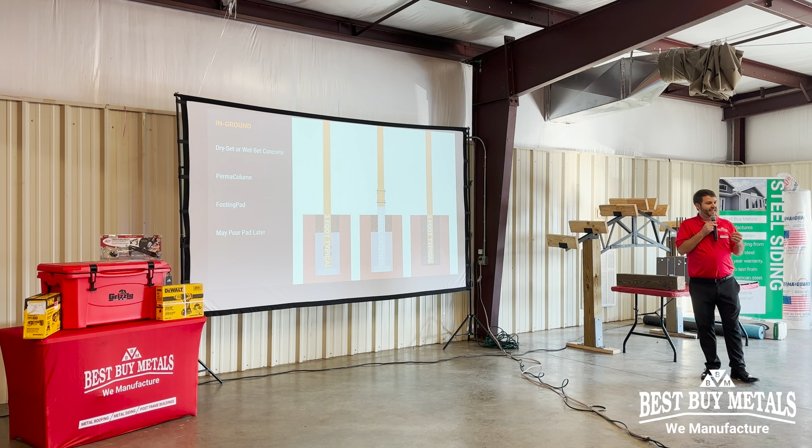We're going to talk about foundations. And there are probably 60 ways to do foundations. I'm not going to tell you all how to do foundations. I want to talk about 6 types of foundations that you should know about, or at least variations of them.

So the first one is you dig a hole. You put in a concrete pad. You can pour that, or you can buy them, 14-inch concrete discs. So drop that down the hole. Your post sits on that. That essentially makes it where your post has something to hold. It's not going to sink down any further than that. It's a solid base for it to sit on. That is optional, but not at all a bad idea.

The other thing I'm going to talk about is these uplift plates. So if you're going to pour concrete in a hole, and your post is going to go in that, these uplift plates are hammered into the sides of the posts. They are an economical yet very effective method of increasing wind uplift when your posts are going into concrete. 1 or 2 per post, just extremely reasonably priced and extremely easy to install, but worth every penny.

You're going to either dry set or wet set concrete. I'm not a concrete guy. I won't tell you how to do it. Some people say don't dry set them. Some people say definitely dry set them. The benefit of pouring your dry concrete in and pouring in water later is you can do that ahead. You can go ahead and get your dirt in, and then you have more time to get your posts right where you want them, a little bit right, left, as far as just making sure they are perfectly level.

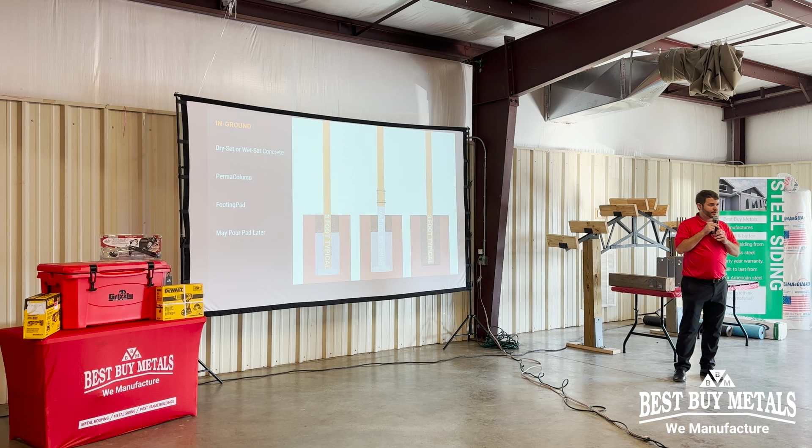And also the depth. So this is showing about a 3 foot. Depending on how much concrete you're putting, you can also do a 2 foot and do a bigger, wider pad. So this is about 18 inch. Sometimes people do a little bit narrower than that, maybe 16 inches. Some people do 24. It's all about what you're trying to hold down, and also how much weight is going to be applied to that. So that's just a common way to do that.

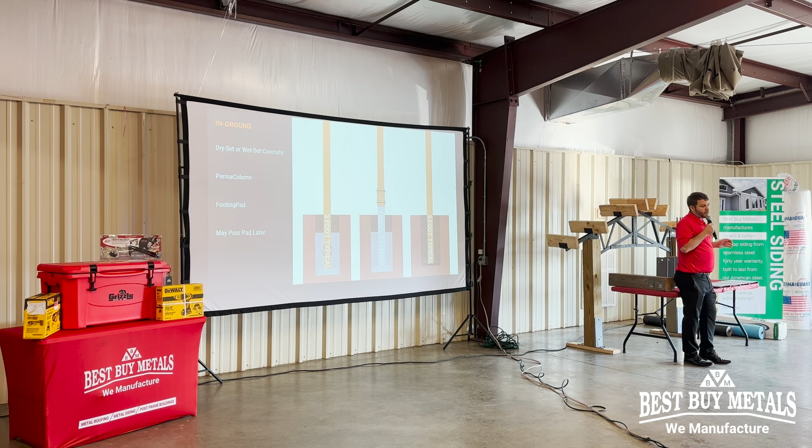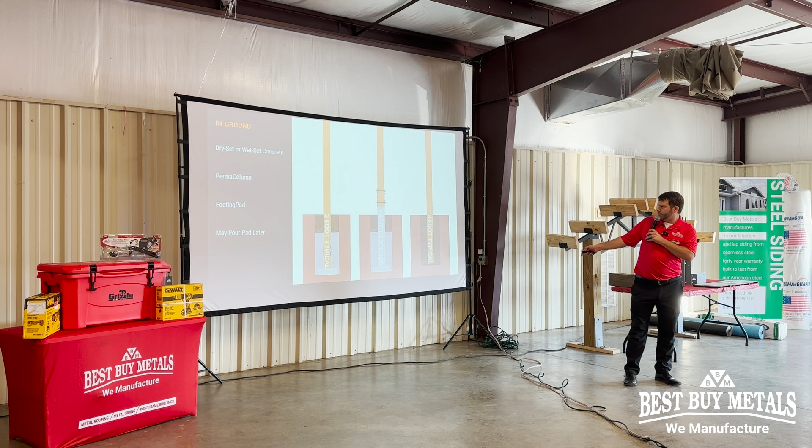PermaColumn. So this is a different method of anchoring entirely. So you're still using a pad. PermaColumn has a 40-inch high precast concrete, high density concrete, and it has the anchor similar to this, already precast into it. The biggest benefit of that compared to setting your wood in the ground is here's all the dirt. There's all types of bacteria and algae trying to eat away your wood if it's in the dirt. If your post goes up here, it's away from all that.

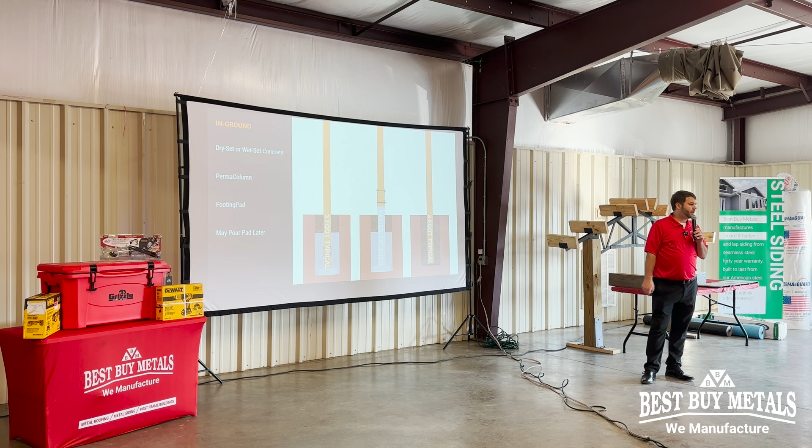To alleviate that, there's a lot of things you can do. Some people wrap their posts with something similar to ice and water shield. Some people dip it in tar. There are plastic covers you can slip over the end of it, but it's still in the dirt. And so this is just a way of saying let's keep our wood away from the dirt. And just highly effective. It's going to be more expensive. Depends on what type of project you're going to do.

The other thing it allows is you can visually inspect your post. If your post is here, properly treated, it can last 40, 50 years. Here, whatever it's doing, you're going to see it. It's right in front of you.

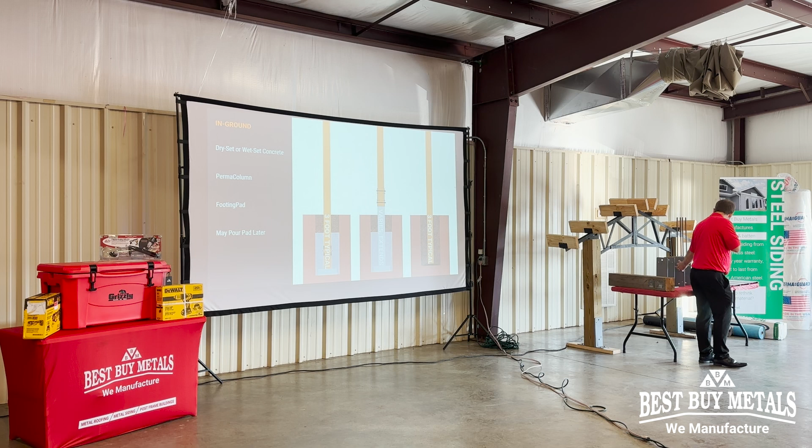This has a 1/2-inch bolt, 2 of those. Typically what people do, and we'll talk about that in a minute, but there are 4 smaller holes. You can use just like a regular wood screw for metal roofing. So it holds it in place until you get your levels all perfect. And then once you get all that right, then you're going to drill for your 1/2-inch hole and go and set those bolts.

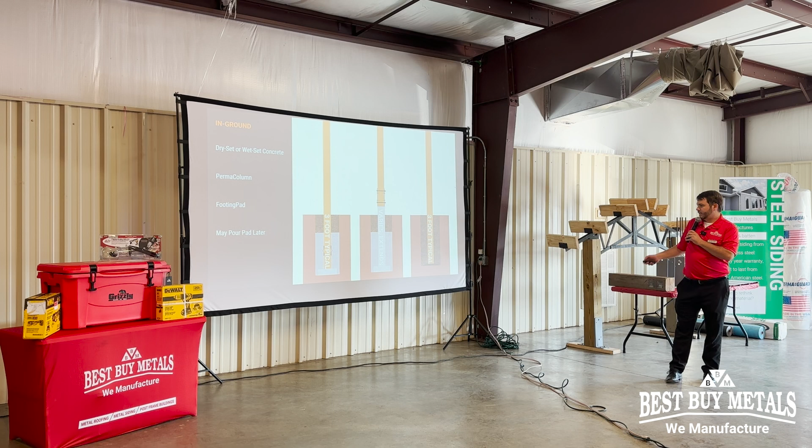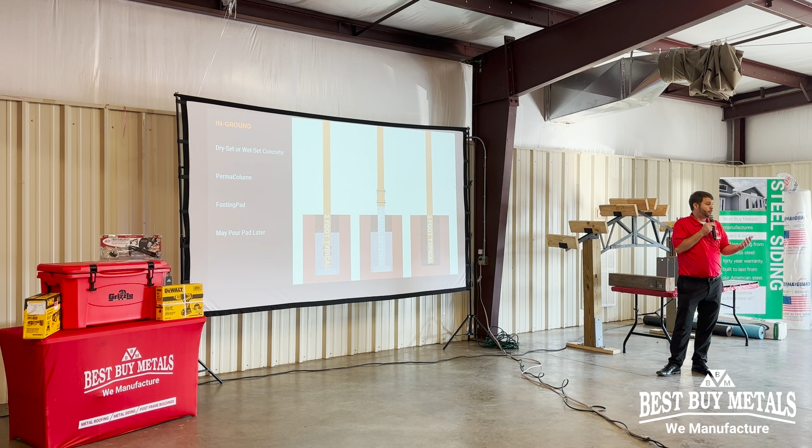And the last one's called footing pad. The main idea of this is you're taking the weight of the building and making sure the whole weight is supported by the dirt. You don't want it to settle and push down further. This is not going to give you added uplift, but depending on the project, that may not be as important. The weight of your building holds the building down as well, so the weight of the concrete does a few things, but the weight of dirt is actually very effective in some situations.

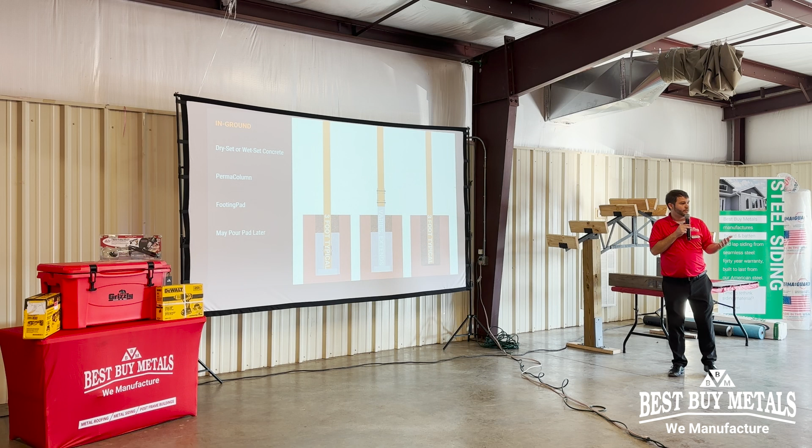Basically it's a plastic pad, and you drop it in the hole just like you would the concrete pad. It makes it so the pressure of that post is evenly distributed in that hole. So that's a few in-ground options.

Now on to slab options. The first one we're going to talk about is drill set. Before you get to that point, I don't claim to be a concrete pour expert, but whether you're pouring it yourself or working with someone that pours pads, you need to know what you plan to do based on the building. That can be different depending on whether it's a shop, a garage, a home, or a barndominium, where you're really trying to make sure you're dealing with any sweating with the concrete.

You're going to have crusher gravel, generally a few inches of that, and that helps level your ground and also makes sure it's nice and solid. Depending on the situation, you may also install plastic, and you may also install insulation, whether that's rigid foam or radiant, kind of like double bubble. Double bubble actually works well for that, or closed cell spray, which is less common under floors. One of the things that's important to think about with those layers is they add thickness, so when you're thinking about what you're going to be adding now or later, keep that in mind. Everything raises up the level you're working with.

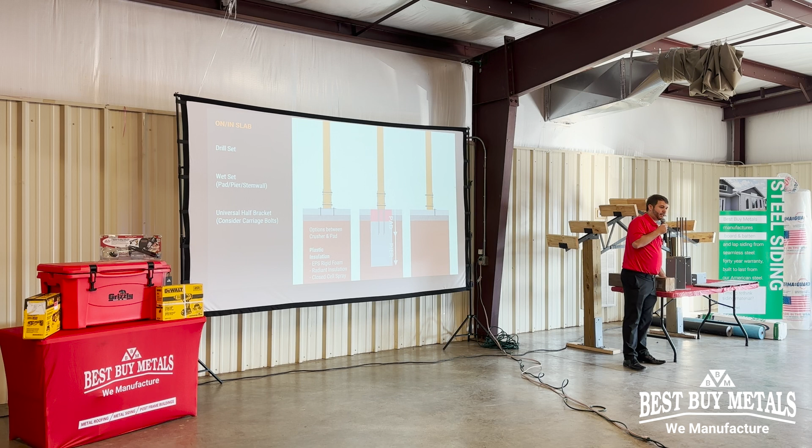The drill set anchors, so you're going to drill your holes, have a 5-inch anchor. I wish I had one here to show you, but we've got them at the shop. You drill those in. The benefit of a drill set is you can pour your pad, get it all ready, and once the concrete's dry and cured, measure for it, and then just like you would anchor a piece of equipment down in your shop, it's the same idea. You're fastening it down with 5-inch anchors that are going to do a very good job of holding that down.

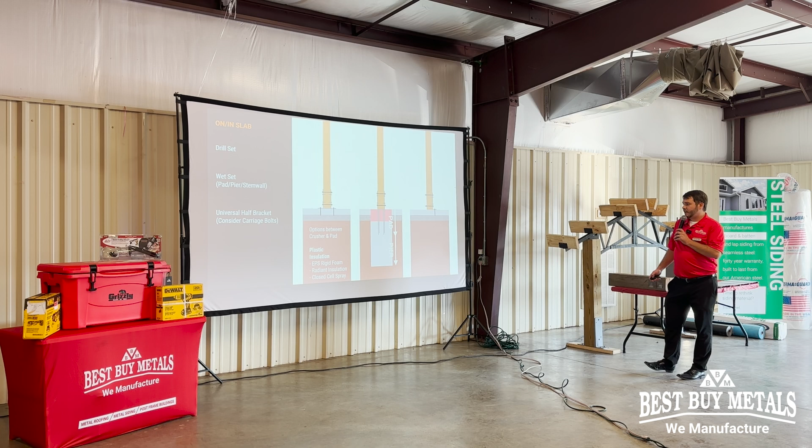The next option is wet set anchor, and there are two very different purposes or uses for this, and it depends on what you're doing. If you're going to put a pad later, at that point you may not need this to go down as far because you're going to have all of the concrete - it's all going to mold together and provide uplift and stability. So you may only need to go down right past the 18-inch rebar.

These are heavy duty. Basically the benefit of that is you've got 18 inches in the concrete. They're just extremely strong. You really won't beat them for strength.

If you're doing piers, so if you're drilling and not doing a full concrete slab, you're just going to put piers wherever those are at. Generally people will go down a little bit further, depending on the size of the building. If it's a smaller building, you may not need to go much further down than the typical 18 inches, but if you're holding a heavier building, you'll want to go down a little farther.

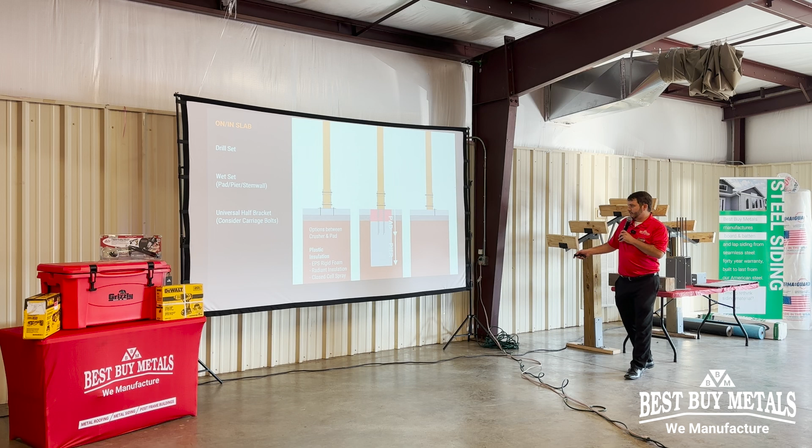This is a sonotube. Basically they sell them at Lowe's or Home Depot or wherever, but it's just a cardboard tube that works as a cast. You slit it, put it in that hole, it expands out, and it gives you a nice level, round surface to pour your concrete and get everything level.

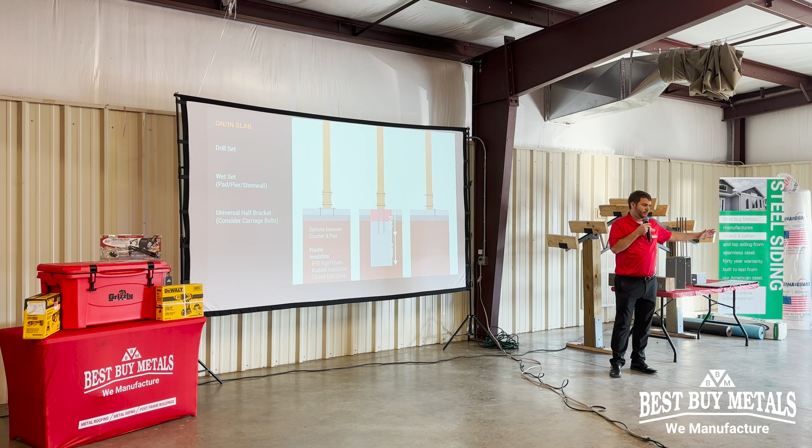The disadvantage of a wet set is everything has to be timed just right. Everything's got to be measured out, and you need to know where those holes are at before you pour. You may want to only pour half of yours and set those, then pour the other half and set those. You don't want it to dry up before you get those in, trust me. Then you'll be saying, let's skip that and move to that. So let's try not to do that.

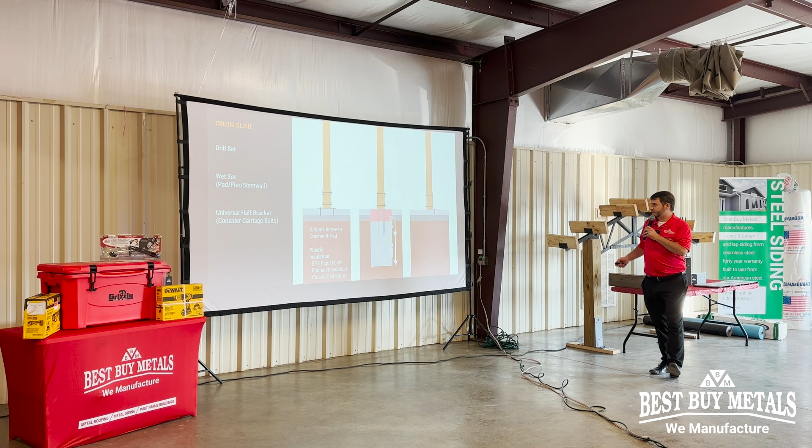The last one is a universal half bracket. The benefit of a universal half bracket is when you get to outside corners, this is going to have a bolt on the outside of your building that can interfere with your wall girts if it's going to be enclosed. Or the drill set has a bracket that will definitely extend past the edge of that corner in some direction.

Your wall girt will cover a little bit of that, but this bottom leg is going to stick out past your building at some point. That's not generally desirable. The other thing that's good for is for doors, where you don't want that bracket sticking into your entrance of your door and you're going to drive over the bolts. So most people just put one of those to hold up each door post support.

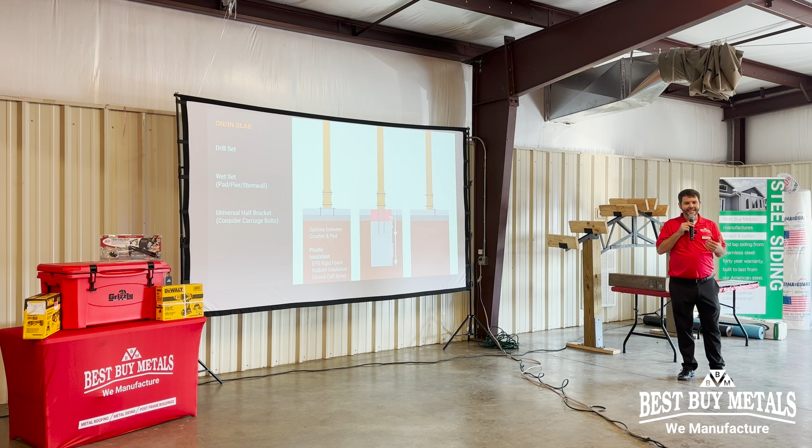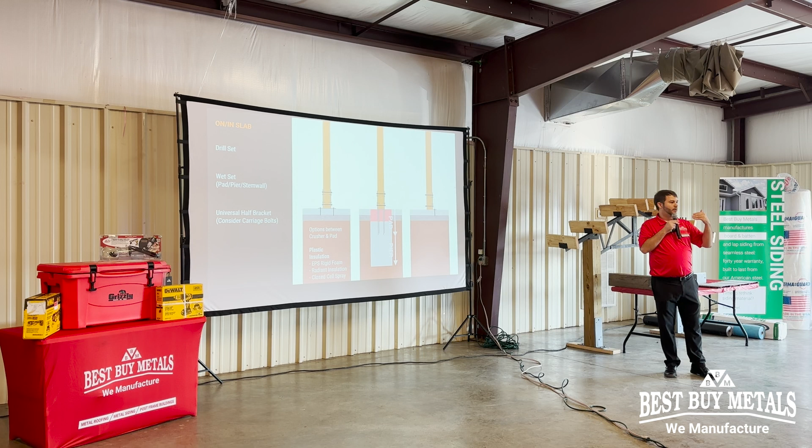Also for those, if used at a door, or even if used at an outside corner, some people use a carriage bolt just to make sure that it's flush. So you can use that to pull that bolt in so it doesn't extend out and interfere with or require that you adjust some of your wall supports. Because we use all drill sets here, you'll see that we had to use some additional wood blocking to help support in certain areas. That's the benefit of these half brackets: all of your wall girts can just be fastened, especially if you use carriage bolts. They're not going to interfere with any of your wall girts being installed.

Site prep really depends on what you're doing. But first thing is you want to think about the water flow. Last thing you want with any construction project is to have water that's going to go towards the middle of your building and pool. So whether it's going to be open frame or enclosed, just keep that in mind.

If you're pre-pouring your concrete pad, that's another thing some people do - they'll install their posts and get everything done with or without gravel, and then come pour the pad later. But if you're pouring a pad ahead of your posts, just keep in mind the size, making sure that all of your brackets are going to fully fit on it. If you fail to account for those half brackets, they might stick out past your pad, and you don't want that to happen. So that's another benefit of those half brackets.

Squaring and marking - we'll talk about a rotary laser in a little bit, but that can help really get a laser line to make sure that those first two most important measurements are perfectly at a right angle. Highly recommended. If you don't have that tool or access to a rotary laser, then you'll definitely want to focus on A squared, B squared, making sure it's squared using C squared.

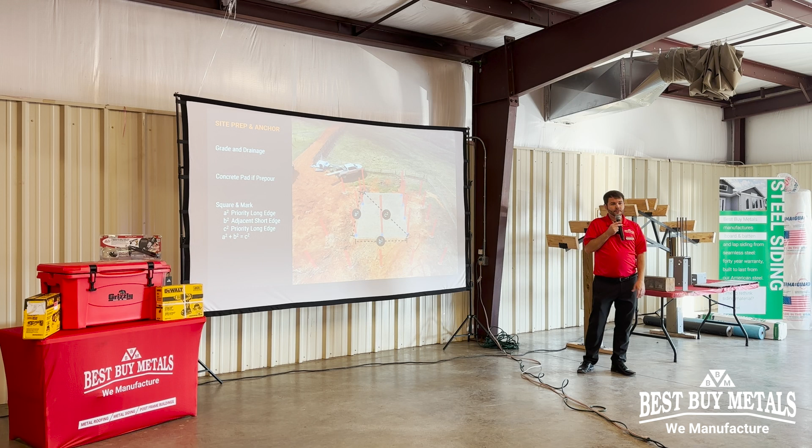So we offer a post layout. Megan, will you stand up for me? And Sarah, will you stand up? Megan, Sarah, and Kelsey are post-frame building experts. If you go to AmericanPoleBarns.com, you put in what you're looking for. If it's a straight run with lean-tos, you can just use words. If you're trying to match something, you can upload drawings. What we'll send you will be all the drawings, a full material list that will show the spacing on posts and all of this. Thank you.

I'll show an example of that here in a moment. So again, what you're looking for is the measurements - setting those two, and then using that to get those two. From there, anything else you're just going to measure out and make sure you're staying square. A squared, B squared, and C squared work the same, whether it's a rectangle here or a rectangle here. So everything needs to be square. The good thing about wood and the good thing about steel is they're a little bit flexible, so you have more give than some materials.

That does not excuse designing things and laying things out properly. So don't use that as an excuse and say, 'Oh, we'll deal with it when we start slapping on the sheathing.' Go ahead and get it square now.

So this is a post layout. It's not the same building as this one, but what you're looking at is the drawings. If you don't use the drawings, it may not work out so well. So if you get a quote, before you place that order, preferably before you send it to your customer, take a look and make sure it is what you've asked for, because we send those drawings so you can verify them. This is included with every one of our shop drawings.

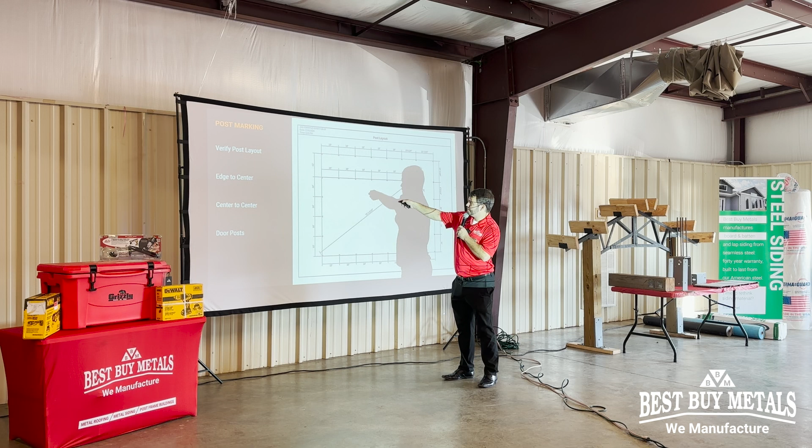So you're talking about a 40 by 60 building with a lean-to that is 12 by whatever it takes to make that corner. One of the important things is the difference between the typical 10-foot on center, which is center post to center post, versus the outside post. To make your building be 60 foot long, that last post is center to outside. That's important because if you set that center to center, your building will be 60 foot, 2 3/4 of an inch.

And that may be fine, but just know it won't be quite what the drawings show. So for that purpose, if you want the drawings to lay out nicely and you want to be able to verify your diagonal measurements, use the measurements here, or before you order it, get it adjusted to what you want it to be. Just keep in mind that we're building all the material, not just the posts, but also the wall panels and roof panels based off of these drawings and measurements on the posts.

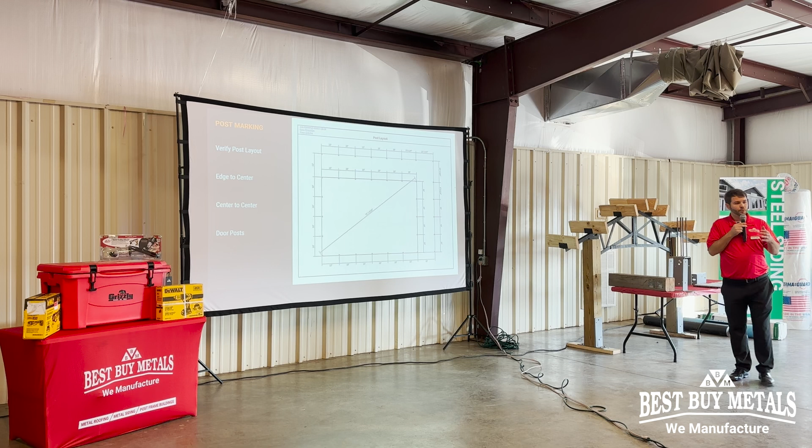So edge to center may be a little different on your corners versus the rest, which will all be 10 foot on center. This drawing doesn't have doorposts, but those will be whatever they need to be to support whatever door's there, if you tell us about it. So if you plan to put in a door but you just tell us it's a 40 by 60 and don't tell us you have a door, we're not going to figure extra posts for that. So if you want a door, even if you want to buy it somewhere else, tell us about it.

Doors we provide: walk doors, and roll-up doors in sizes from 8 foot wide to probably 20-some foot wide.

If you have windows, we don't sell windows, but we can still make sure we provide the materials and show the cutouts to plan for those.

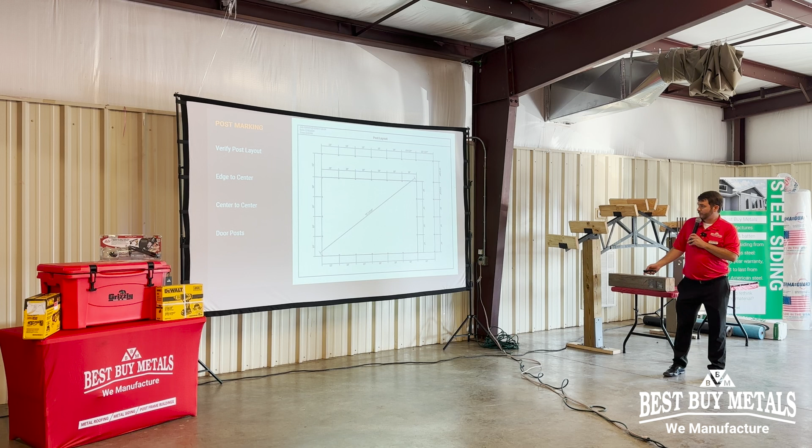Everything's level. Depending on whether it's concrete and you're using wet sets or drill sets or half brackets, or if it's in ground, in which case you may be pouring a pad ahead of time and using a half bracket, a wet set, a drill set, or in ground.

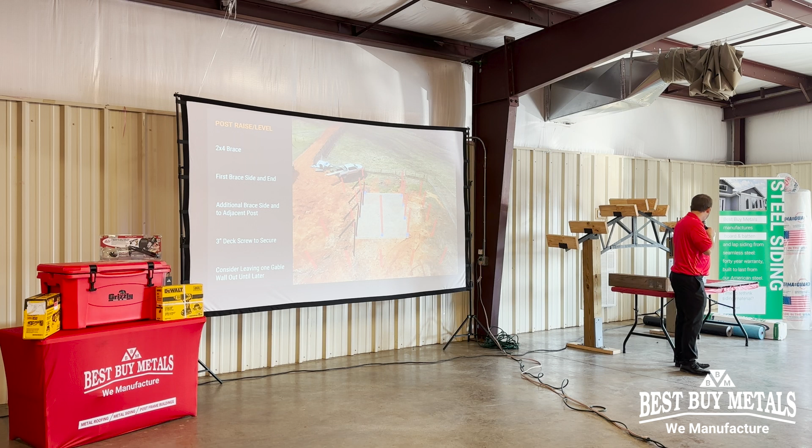Either way, they all need braced. So if you're using a wet set or drill set that's cured, you may not need as much bracing as if it's in the ground, but either way, you still want to brace it to make sure you're getting your post level.

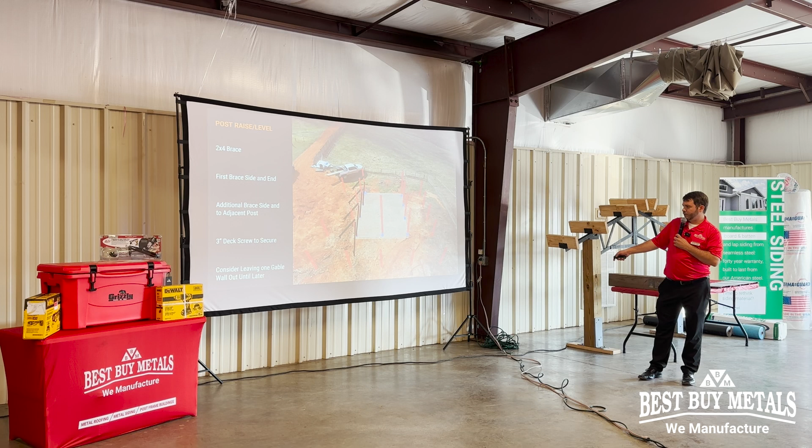To do that, typically you're going to start with your first post and brace it from the side and from the end, working with it till it's level both ways. Use a short spike piece of wood just to support that in the ground as an anchor. Typically we'll use the same 3-inch deck screws that we're using for our girts to tack those.

After that, the remaining posts in that line are going to be fastened from the side to the ground and from the previous post to that post.

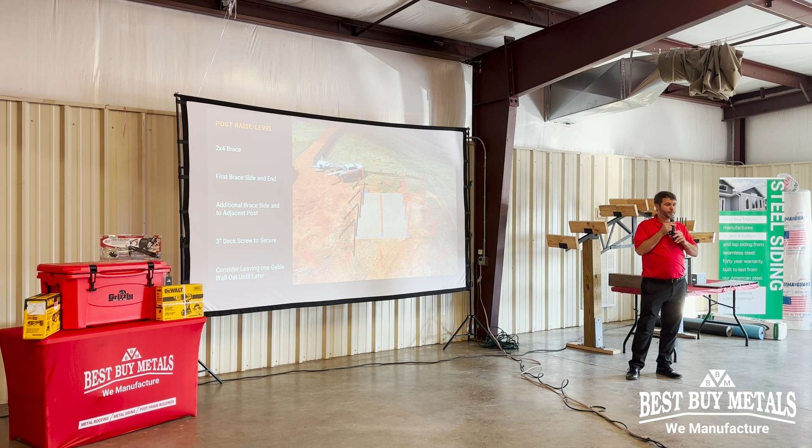Here we've shown leaving out a gable end. It depends on what opening sizes you have and the size of the building. That just allows you to get equipment in easier. You can always add the supports here later. You may have plenty of room and can go ahead and put those posts in, depending on the equipment and the size of the truss, but it just makes it easier to get those trusses up later and get everything in place.

A couple of tools for getting your post level. There are some really complicated tools to get that post level, or you can buy a $7 post level. It straps onto your post and levels it in all 3 directions. So that's what I would recommend. You can buy one for the bottom and the top for $14.

So for getting the level of that post, again, you could use a lot of complex tools, but just because it costs a lot doesn't always mean it's the best tool for that.

A rotary laser level, there's different ones, and some of them have different features. Some have the option of a stationary laser that'll help you set your corners, so it's 100% exactly a 90-degree angle. You can set that at your corners, shoot your lines, and you still have to make sure your distances are right. You still want to check that the Pythagorean theorem has worked out.

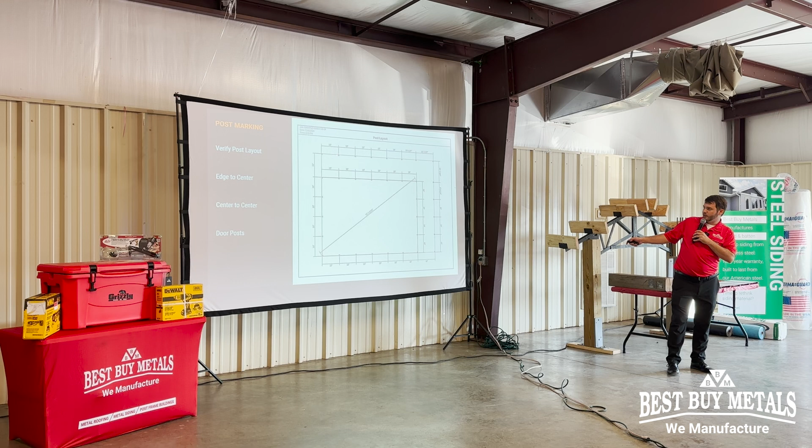So if you set your two corners adjacent to that, you still want to measure that diagonal. If you're good at math, that's great. If you're not, Google a Pythagorean calculator, and it'll give you the measurement you need based on the two you have. That's on here as well, but it may not be on there for every situation. I can see there may be a need for a little one here that isn't on this drawing, but you can still use a squared plus b squared to find that diagonal.

Another benefit of a rotary laser level is really for grading. When you talk about getting your pad level or getting your crusher level, or making sure it has a certain amount of slope, you're basically going to set this up. You figure out where you want this at, set that as your zero, and then it'll beep when it gets to the right spot, or stop beeping when it gets to the right spot.

So depending on the tool you get, it may or may not have the ability to do your 90-degree angle, but typically it just spins around. It's looking for this, and it's looking for more of the height.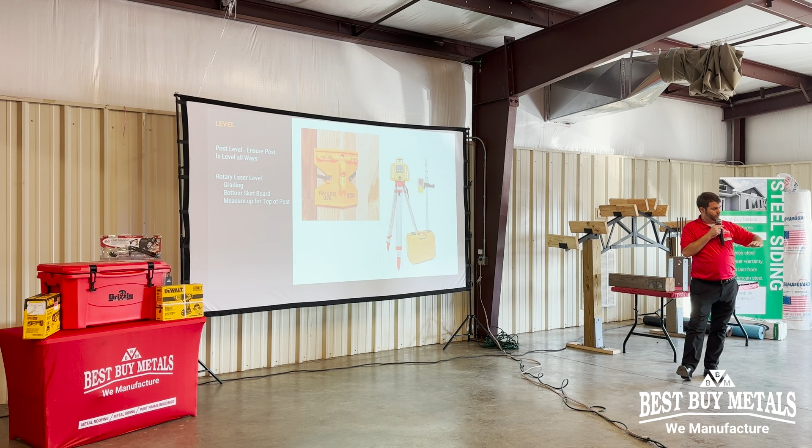Another benefit of this is for the top of your post. Think about these trusses sitting on top of those posts. If your ground isn't perfectly even, you don't want to hope your holes are all the same depth and just cut them wherever, hoping they'll all be level. So really what you want to do is figure out a certain distance, find your highest post where it meets the ground, and set that to zero, making a mark on all of your posts to use as your zero.

Measure up to how tall you want your walls, subtracting the dirt or whatever. That'll give you your skirt board line where you put that board, and also you can measure up from there to plan out all the other girts. So if you have a consistent base level, you cut off the top, whatever it needs to be, to make sure all of those trusses land on a post that's at the same level.

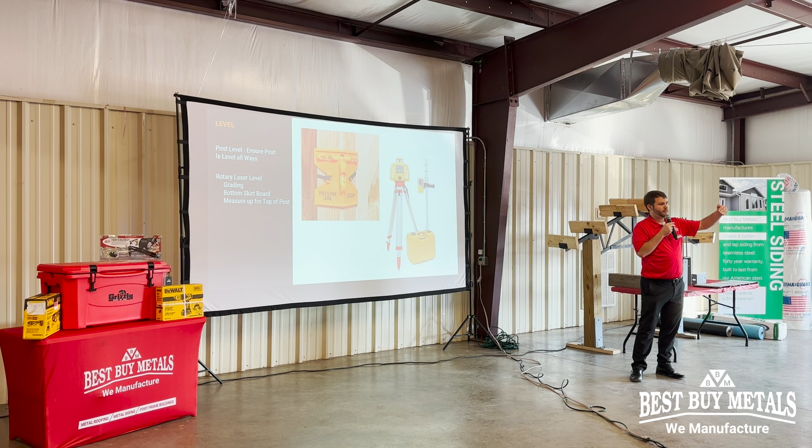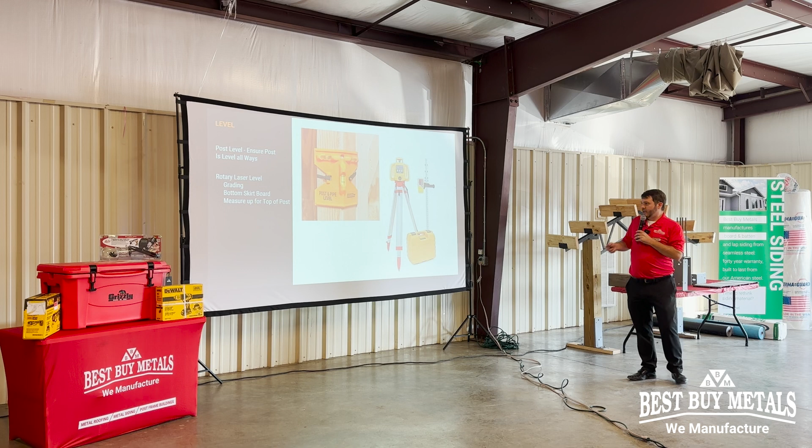You can make a pattern and plan all of your markings, so from here to here is 24 inches on center, all the way up. Usually at the top, you're going to leave that last board off if you're doing soffit, just to make sure you know where to fasten it once everything's in place for your fascia board, going to your soffit and going to your wall. So really some good things with that.

Okay, so these posts, the anchors have already been set. If you look at this, we're talking about our door posts and our corner posts. These are wet set brackets. So in this case, just imagine these are your poured pads. You put your Sonotubes in, you poured up to the level of that Sonotube, made sure those are all level, and made sure to put those wet set brackets in before they dried, because it's harder to do after they dry.

So we've leveled our post. Use the post leveler. We've leveled it.

Normally you would take a short screw and just tack it in place, but in this case they've already got that all done. So drill your 1/2-inch hole, impact driver, and pull those. If this was an outside corner and we weren't using a wet set, or even if all the rest were wet set, we might think about a half bracket to avoid these bolts getting in the way, where we wouldn't have to put these wood blocks there.

If you do decide you want to use a wet set at the corner, some people actually grind off the outside of that wet set bracket just so it doesn't interfere, and just use a lag bolt, just tack it in place from one side, or use a carriage bolt to flush with the outside of the wall so that you don't have any metal that's extending out and interfering with any of your wall girts. So that would be the case for all 4 of these.